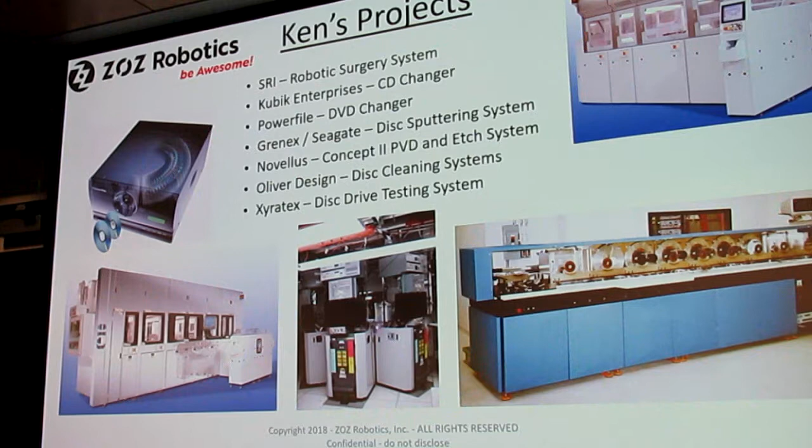One of them is a little CD changer. I actually did 2 CD changers. One I started myself, and this one with PowerFile I started with some friends of mine. I worked on some big capital equipment for disk drive cleaning, disk drive sputtering.

I don't know if I can show a cursor. No, I can't really show a cursor. So, hang on. Oh man, I messed up now. Okay, wait, sorry. All right, there we go.

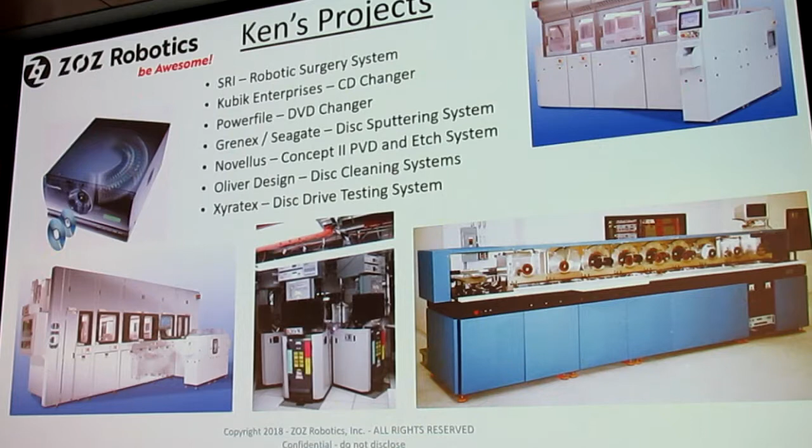And I worked on some systems for Novellus. So I've been building stuff for over 40 years in the Silicon Valley.

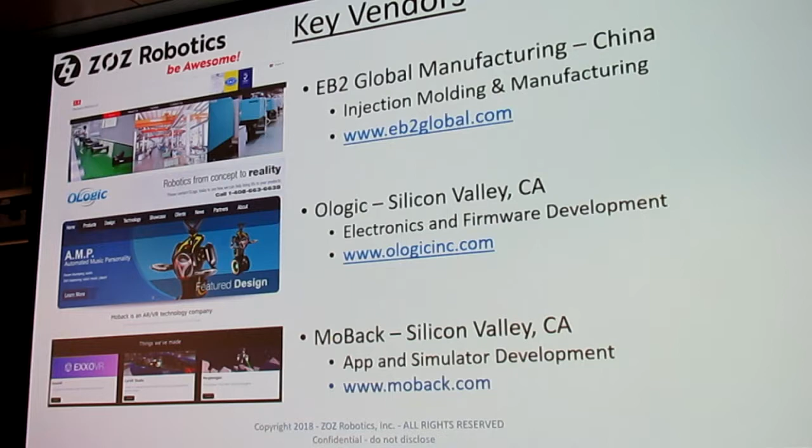We don't have any employees. It's all, this whole project's been done through consultants. Ted Morrison. Some of the key ones are EB2 Global Manufacturing, a company in China that a friend of mine owns with his wife and his uncle. His expertise is injection molding and manufacturing. Then local company, Ologic. Ted, and then Rob, and then Ted Werberg. And then MoBack has been working on our app, and they're also helping us get our simulator back online.

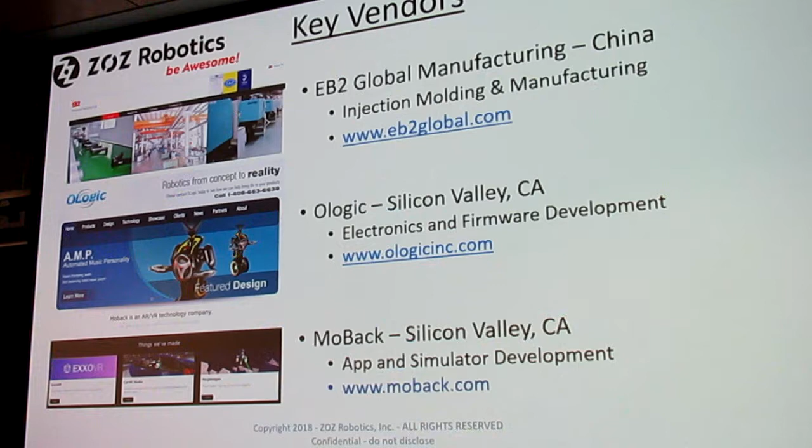I'll get into that a little bit. And then we're working on an advisory board. Right now, Drew is our only member. We're trying to recruit some more.

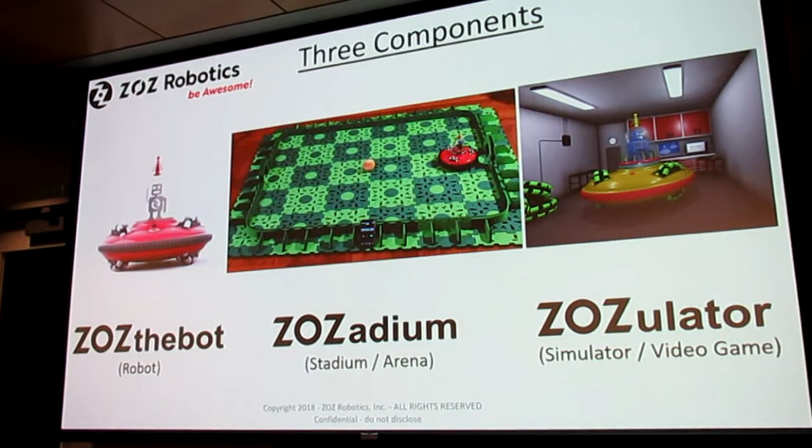So ZOZ Robotics is basically three major components. We have a robot, a stadium, and a simulator. The simulator is kind of like a video game, and we're going to first talk about the robot.

So it all started when I was sitting at the dining room table and I was contemplating the salt and pepper shakers. I thought it'd be fun if I had a little robot that we could drive around, control with your phone, and push those around and push them off the table. And if everybody had a set of salt and pepper shakers and a little robot, we could play some fun games, kind of like sumo wrestling or cutthroat in pool.

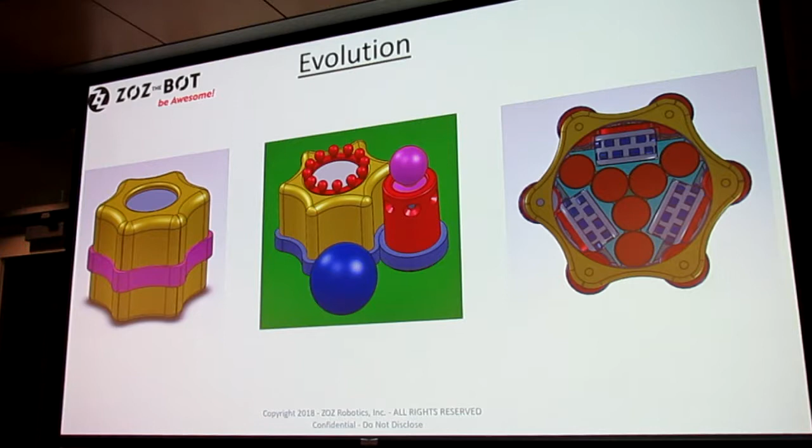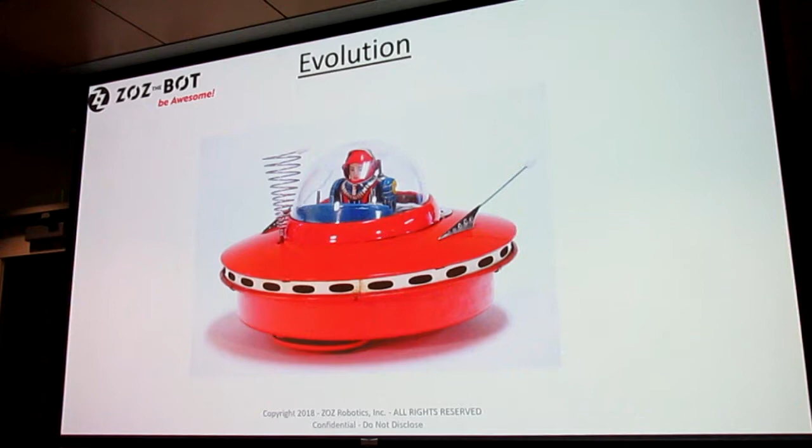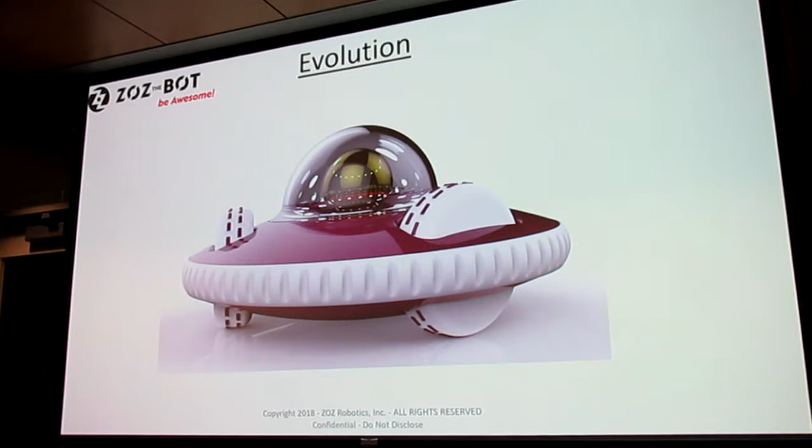So I started thinking about, okay, what's a nice round shape? And I came up with - remember this old toy I had, little robot, little battery-powered thing, that spun around, a little flying saucer. So then we started working with that, and we came up with this little design. That's kind of the first industrial design. And then we also worked on some variations on that.

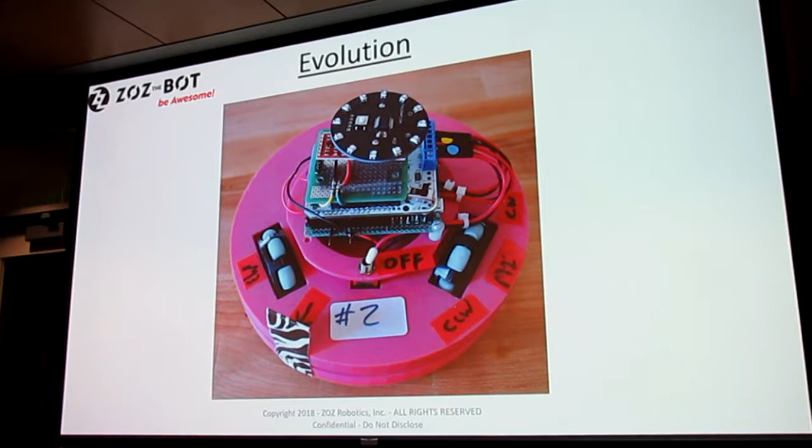Here's the next version. You can see the little orange thing is the radio receiver. This one has a bit more shape than the previous one, more like real industrial design, but still using the same wheels. Here's the inside - you can see the layout with the 3 motors, 3 sets of batteries, and 3 wheels. It's really packed in there.

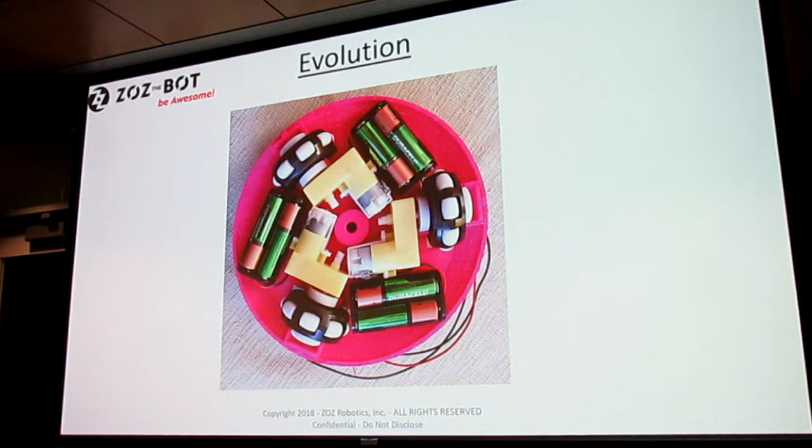And then I had to design a wheel. The wheels have a ball bearing on each side - if I go back you can probably see them there, those white plastic ball bearings. Each wheel has 2 ball bearings, one on each side, and actually 20 little rollers for the Omni wheel.

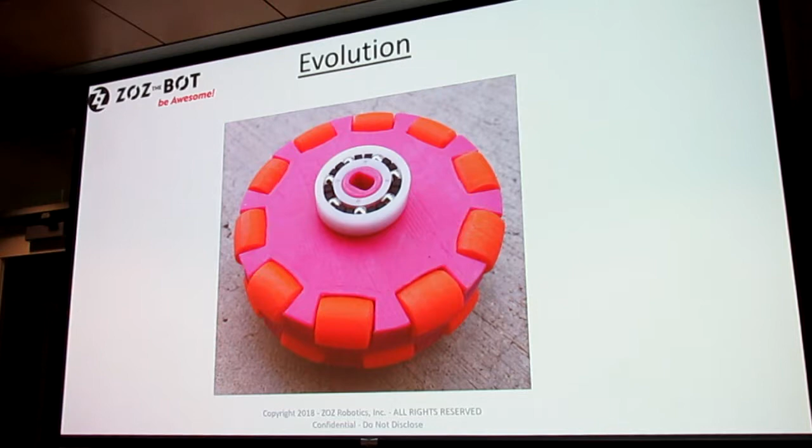So here's another version. The idea was to put your little avatar, your little character, into that dome and drive around.

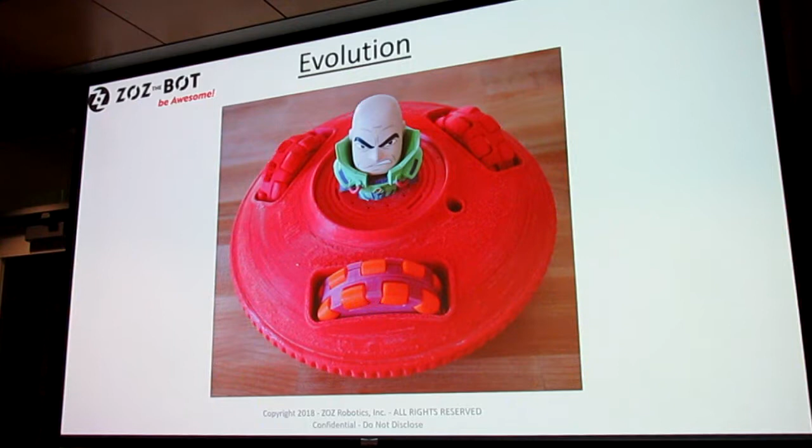But I didn't like that short little dome, so I asked my designer to make it a little taller, maybe make it look like St. Peter's. We tried to copy that and it didn't come out quite exactly, but you can kind of go back and forth - you can see it there. It's been elongated at the bottom so we can get taller avatars inside the dome.

And then there's the whole sequence of the 4 robots. This one here was actually machined and painted by my guy in China. He does amazing work - that dome was machined from a solid chunk of plastic, and he polished it.

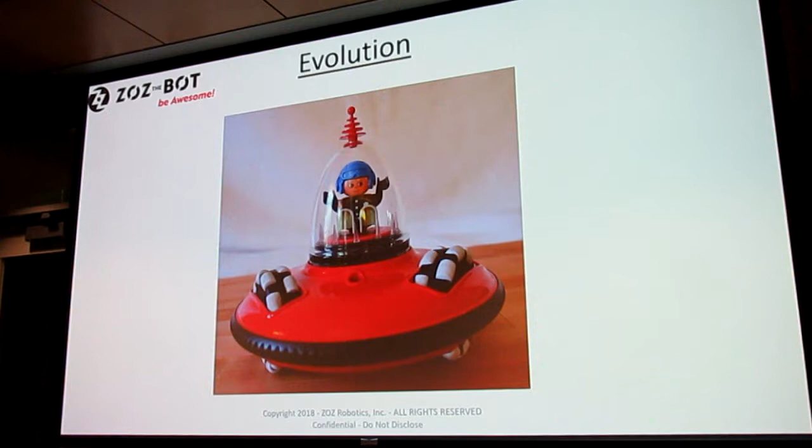Where did that one go? I made 6 of them. It cost me about $10K.

So there it is, and that's kind of the whole evolution. Then we started taking it to some shows. We took it to CES in 2016, and Tom's Guide picked us as best robot. Then last year we took it to the Toy Fair and got a lot of really good positive feedback. Rocky from Superior Marketing, a rep in the southern states, said this is the best thing to come along in years.

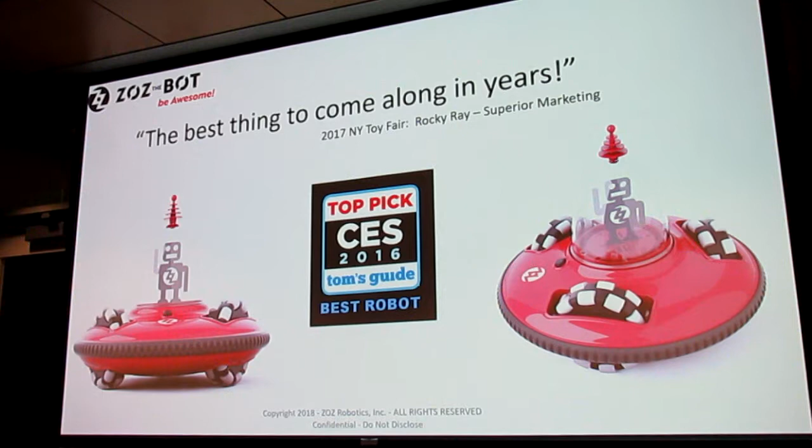So it's an Omnibot - it moves and rotates instantaneously in any direction. It's controlled with a smartphone. There's the app - we did a little Jetsons-style background theme on that.

I don't know if you guys want to read all that, but it's basically available for iOS and Android.

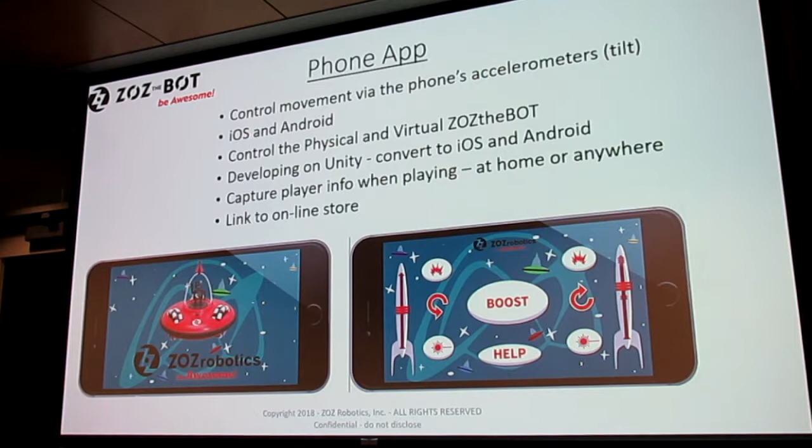And then it's modular. We didn't want to limit it to just simple functionality, so we made it so the dome comes off, and there's an interface on the top and bottom of the robot that we can add different modules to. So it's actually what we call a modular technology platform - we can put basically any technology on this robot.

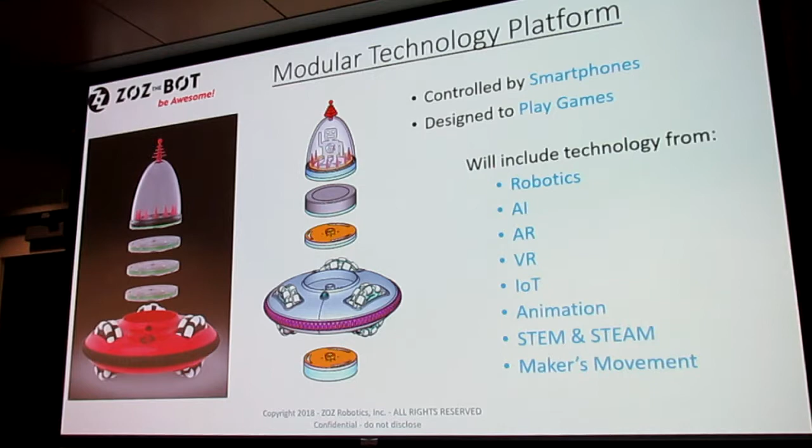So here's the body module. It's too bad I don't have a pointer, I don't know how that works. But on the left you can see the top interface, and on the right you can see the bottom interface, and it has all those components in it.

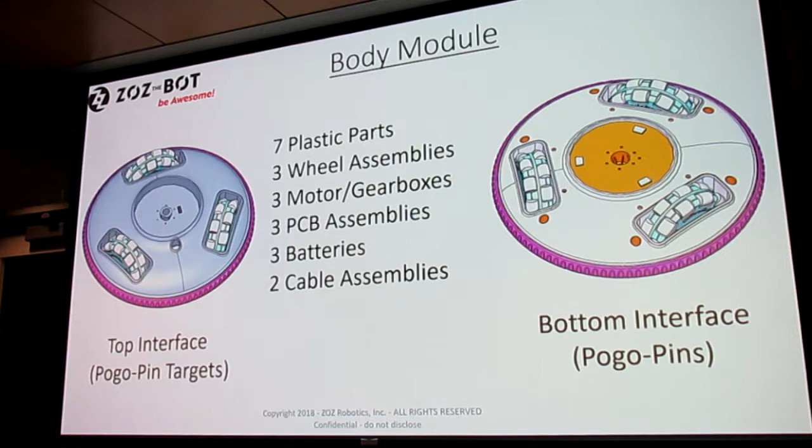There's a little more detail about the wheel. It's made up of basically 4 tools that were made for that. There's an outer hub and a center hub, and then this little wheel is overmolded with urethane, and we got a ball bearing on each side.

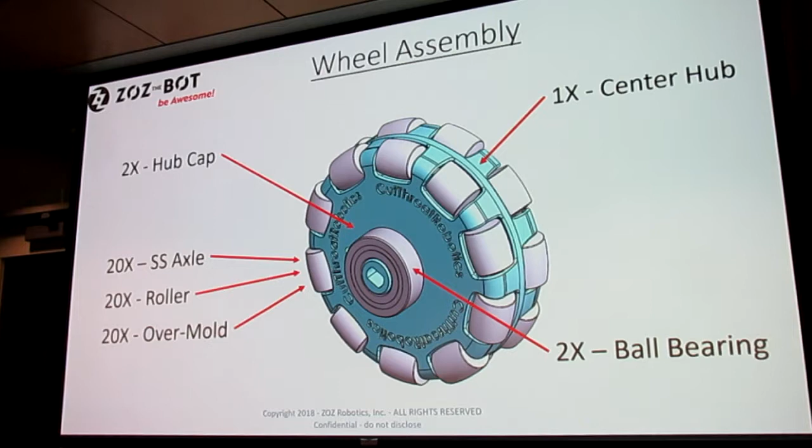Here's what the electronics look like that's in the body. There's a lower main board which has all the smarts, battery charging, and motor drivers and all that. Then we have a little upper main board that connects with a cable to the lower main, and it has a little USB connector for charging, and it has the target pins for connecting to the module above it. Then there's a little IMU PC board for the control that has the accelerometers and the gyros in it, so we can control the direction.

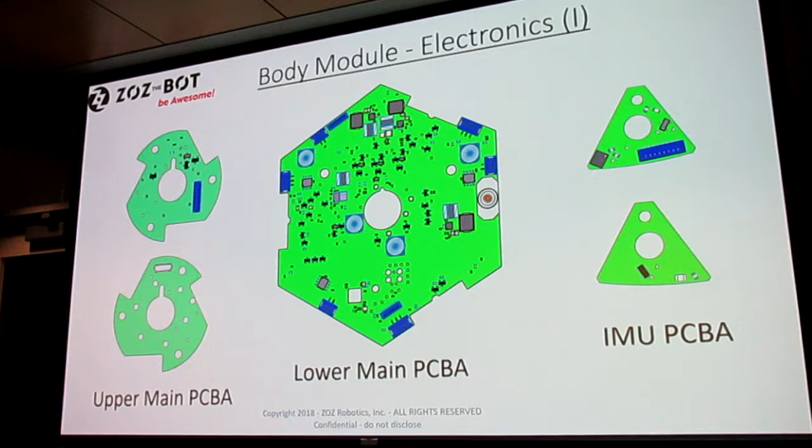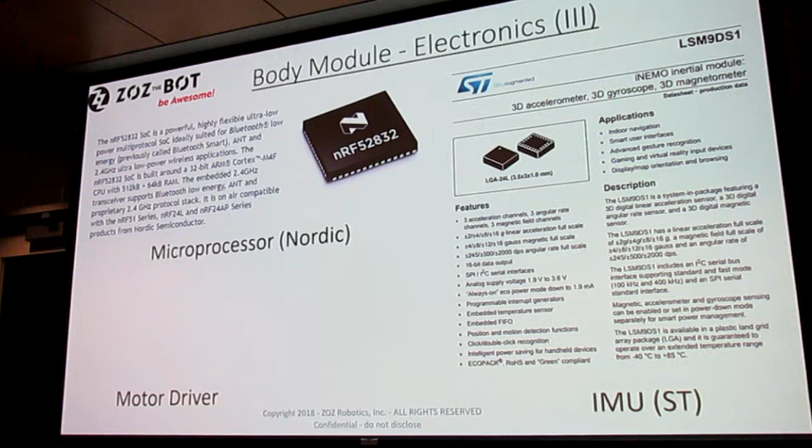I don't know if you guys are interested in this, but here's the main microprocessor. It's a Nordic chip. I don't have the motor driver chip on there. There's the IMU chip, we can go into that later if anybody's interested.

We hit this on our Kickstarter with a little lot, and it was crashing our IMU. The robot just totally shuts down. Nothing happens, like, what the hell's going on?

And actually, Wayne from the robotics club, is Wayne here? I didn't see him yet. No, he's not here tonight. He couldn't make it. Oh, that's too bad. He says his regrets though, he wanted to be here. Okay, thanks. Well, he's the one who pointed this out to us.

So that's... we're looking for some help. We're still looking for help, we still need a lot of help.

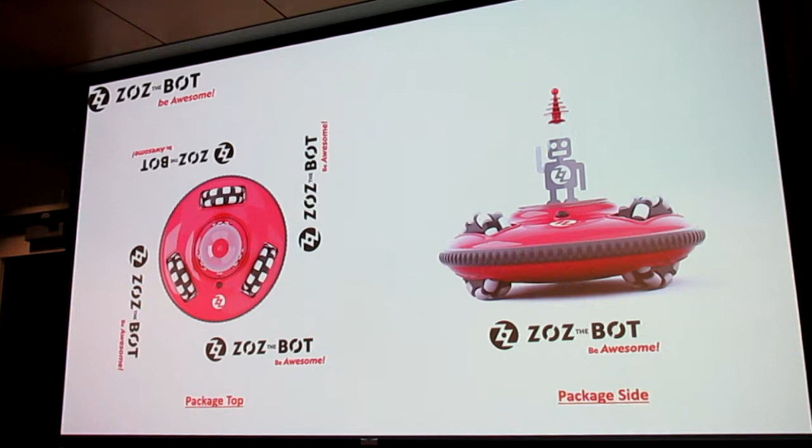Here's the packaging, I'll go through this quick. Not very interesting, but there's the top of the box on the left and the side. We're gonna make it real simple, it's a cube, about 10 inches cube, and we're gonna put the same side graphics on each side. On the bottom will be all the legal stuff.

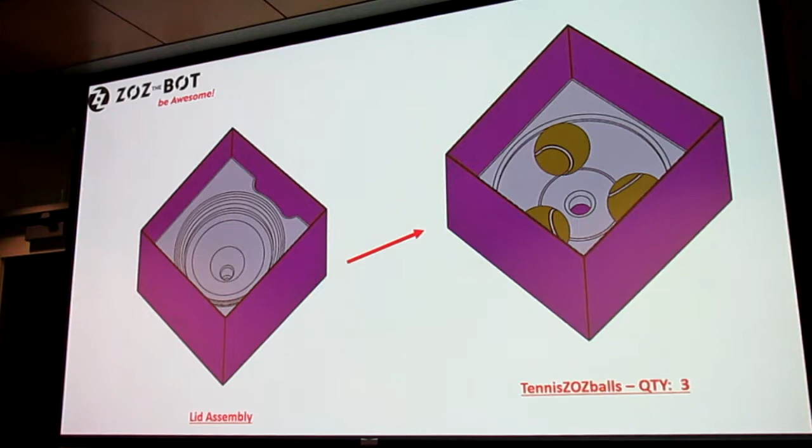And then here's how the box goes. You start with a box, and you take the lid off, and the robot will be exposed. You take that out, and when you turn the lid over, there's room for some tennis balls or balls inside there, because it really is designed to play games with pushing balls around.

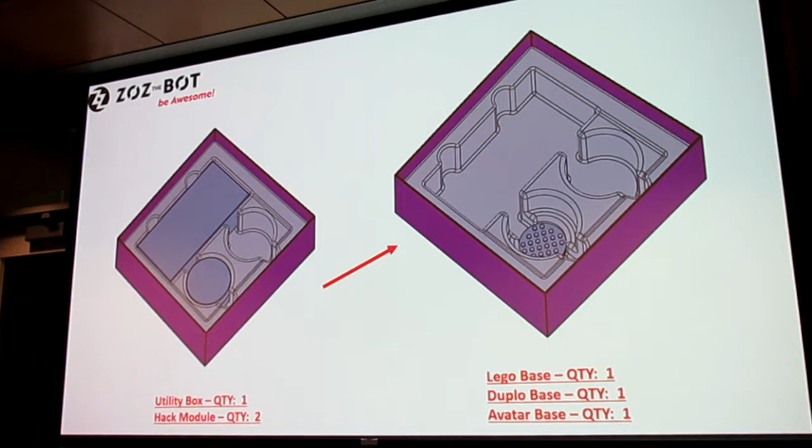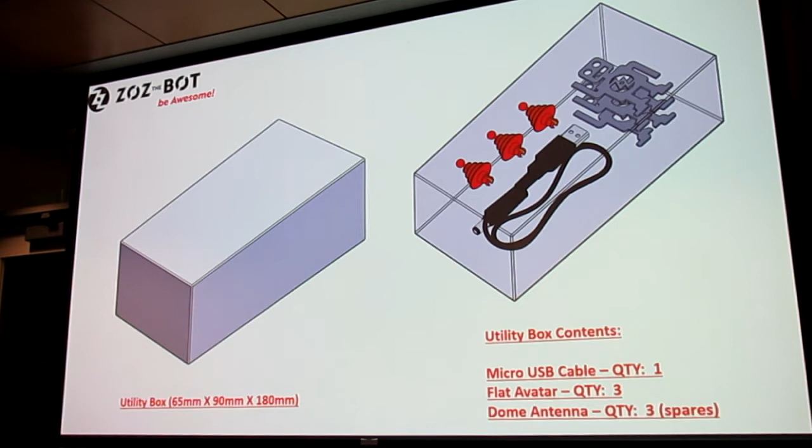So then you take the robot off in this little package, and then you get to where the user manual is and the quick start guide. You take those out, and there's a little box with accessories, and then we have some other modules that we're going to provide with the robot, a hack module, and some little bases that go into the dome to hold the avatars. And then in the utility box, we'll have some extra antennae, because those tend to break off if you drop it, a little USB cable so we'll give some spares, and then a few little avatars there.